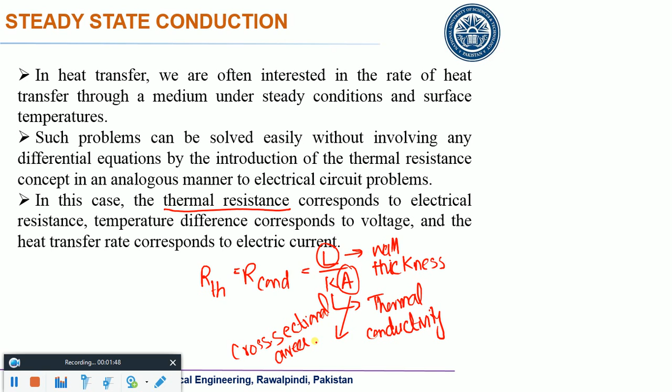Okay, we were at this point, and if you remember, we derived this thing. I would start from this one. We talked about derivation of temperature profile, if you have 1D conduction in an infinite wall.

And if you remember, we have one isothermal wall here, the other isothermal wall here, and you can derive the temperature profile if you have, let's say, some insulation or some flux boundary condition over some wall. You can derive it, right?

And we also derived this equation for this Q generation term. If you have that, then the temperature profile would become quadratic. If you don't have any generation term, the temperature profile would be linear.

So just to generalize this thing, this is, you can say, a note in the ongoing discussion. If you have a varying cross sectional area along the length, then what would you do? Till this time we have been talking about those walls where we have constant cross sectional area.

Constant cross sectional area, that is not going to change. But at some point you may have varying cross sectional area. Like if you go in this direction, you can see that the cross sectional area is varying, right? So in that case, what is the relation for Q dot? That is equal to KA dt by dx.

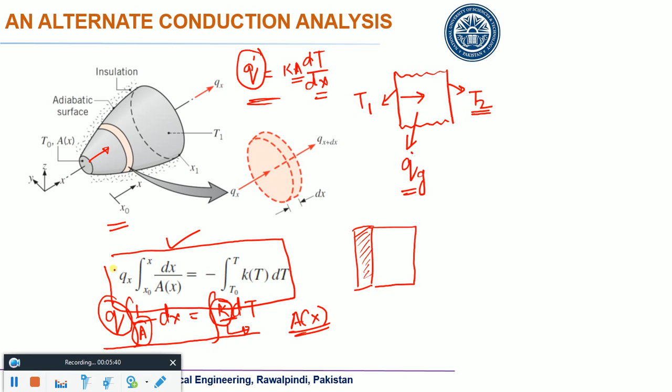Conduction happens in that layer. Outside that layer you would have convection, because there may be water or air present.

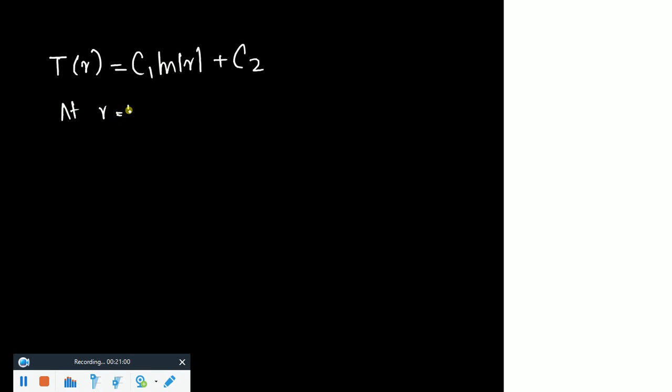So at R equals Ri, let's say, or R1, you had T equals TS1. At R equals R2, you had T equals TS2. Can you plug those two conditions over there? Finally, you would come up with this one.

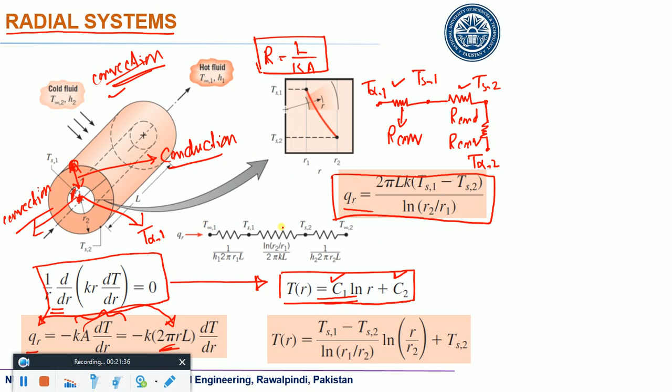Okay, why? Because QR is constant. Is the problem resolved? Any question? So you come up with this thing: QR equals 2 pi Lk times TS1 minus TS2, and then we would have natural log of what?

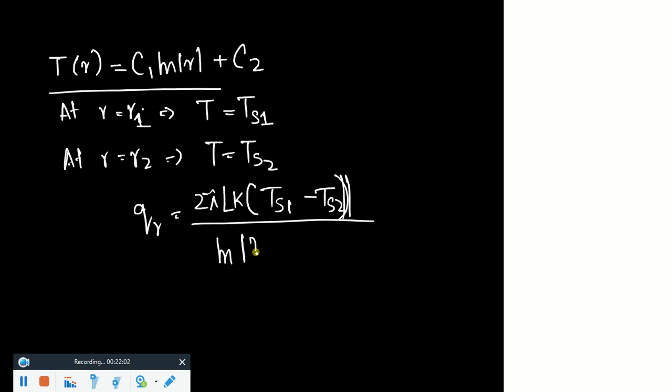R2 by R1. Yes, R2 by R1. Now see, this is what? This is just like voltage difference. This is just like current.

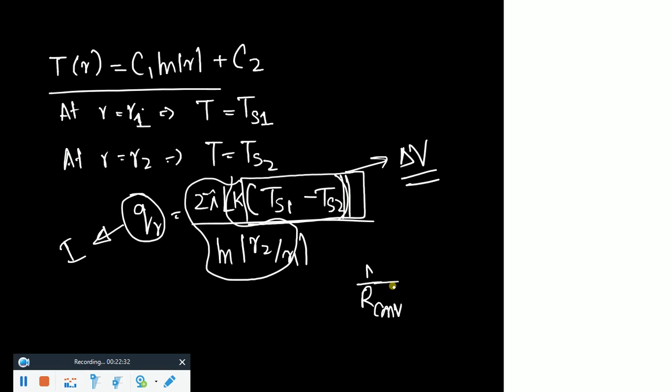So rest of the thing is 1 over R conduction in case of radial systems, piping systems, wiring systems. So you can say that R radial would be equal to natural log of R2 by R1 over 2 pi Lk.

You understand that? So this is the point which I want to emphasize: if you are talking about a plane wall, you know what the thermal resistance is. It is very easily understood: L by Ka. If you have a radial system, the form of the thermal resistance would change.

Now it is dependent on natural log of R2 by R1, divided by some part of the surface area, and then you have K over there as well. Just see, that was L over Ka. Instead of A you have this thing, instead of K is already there, and instead of L you have some dependence on radius.

Sorry? 2 pi L what? No, it is just a measure of area. Like what is the surface area of a pipe? It would be 2 pi R2 into L, isn't it? 2 pi capital R into L. So that R has been counted over there. Just do the calculation, derivation, and you would see how it goes over there.

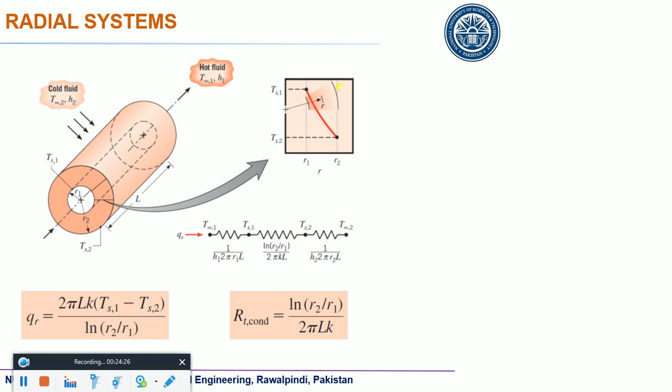So this is 2 pi Lk, and it is being divided by natural log of R2 by R1, and then you would have R radial. Do you understand that? Okay. No, it depends. It depends.

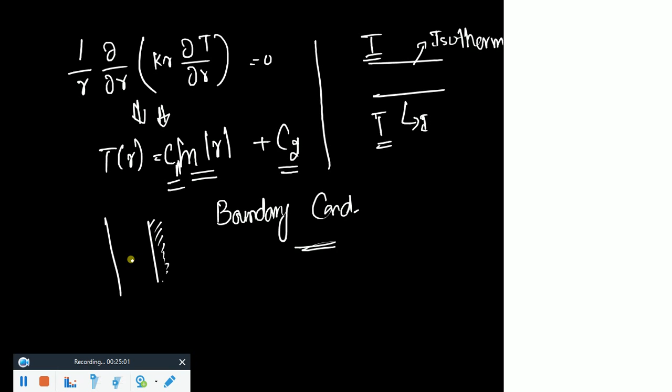Remember, those forms of thermal resistances have been derived for isothermal boundary conditions. I only considered temperatures on those two boundary conditions. So this is an interesting problem: if you take some adiabatic surface over there and you see what would be the thermal resistance. By the way, I talked about this thing in the last lecture, if you remember.

You should remember it. You remember I solved this problem when you have this T1 over there and dt by dx at the other side, which is equal to 0. So what was the temperature profile at that time? That was a simple constant temperature profile. The temperature profile was not changing, and by looking at the physics I can say that if I have some other temperature.

Other than this T1 on this side, and it is an adiabatic surface, heat would have no place to go once it reaches this wall. So it means this is basically physically impossible to have this kind of boundary condition: dt by dx equals 0 at some point, and then on the other side you have temperature.

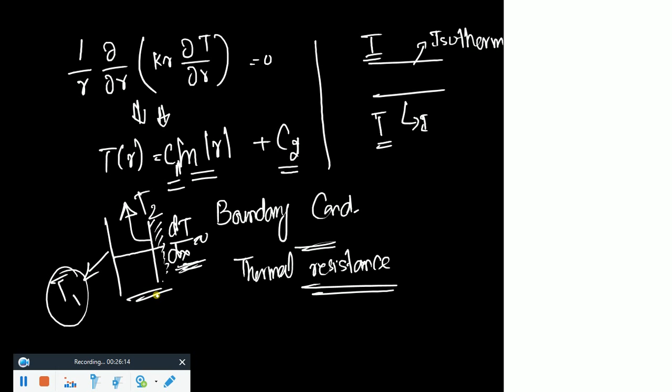So please look at these two conditions, but my point is we have derived this thing for two isothermal sides of a pipe, of a plane wall, and similarly you can see those relationships for sphere as well. So this is your reading assignment. You can see the sphere case in your book. Okay, now there is a very interesting problem.

For example, if you look at a plane wall and you start putting more and more insulation on that wall, what are you trying to do? You are trying to minimize the heat transfer rate, isn't it? If you put more insulation, you try to minimize heat transfer.

Now see, if you have a cylindrical wall, let's say a cylindrical pipe, and you are basically transferring some fluid from one point to the other, let's say it is steam. You can't have ideal insulation, you know that. All insulations would have some value for K, it can't be 0. It means some heat would be lost in any case.

Now for example, if this is a pipe, you have some fluid going through it, and you put more and more insulation on that pipe so that no heat transfer can be carried out from fluid to the air. Now my point is, if you increase the thickness, as far as conduction is concerned, your thermal resistance would increase. If you increase the thickness of the insulation, your thermal resistance would increase, you understand that? And you can say the heat conduction would decrease as far as conduction is concerned.

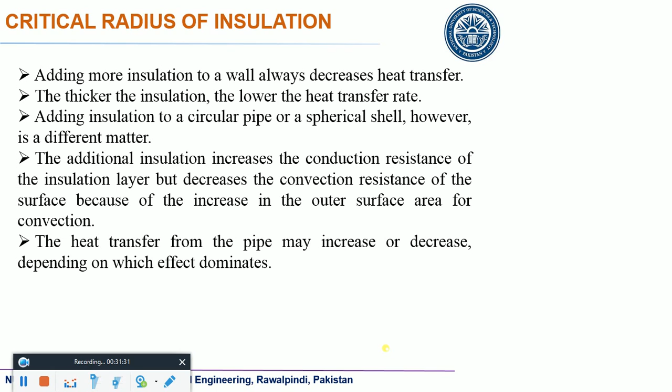So just look at that. Adding more insulation to a wall always decreases heat transfer, because it would increase the thermal resistance. The thicker the insulation, the lower the heat transfer rate, yes we agree. Adding insulation to a circular pipe or spherical shell, however, is a different matter. Why is it a different matter? I told you that adding more insulation on a pipe would increase convective heat transfer rate, but it would decrease the conductive heat transfer rate. So you should have some kind of compromise between those two.

So I want to solve this problem. Okay, I want to solve this problem. Just look at it.

Why? Because if you talk about this, this is conduction. If you talk about heat transfer from the outer surface, this is convection. Now, these are the thermal resistances for both of these heat transfer phenomena.

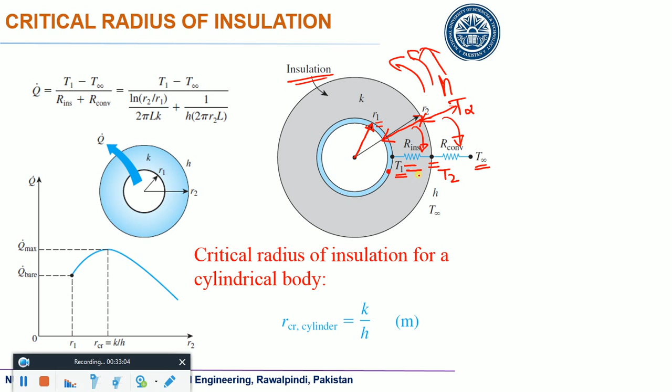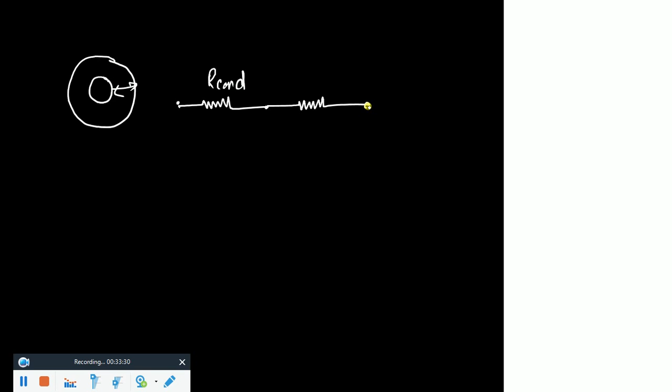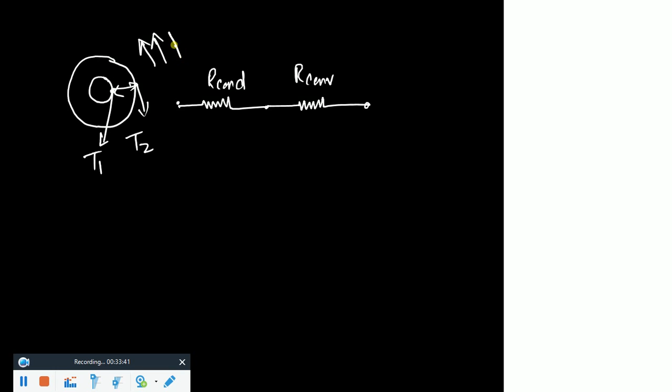Let me draw it over there just to clarify this thing. We have this pipe. For this conduction I have this resistance. For the next one I have convection. On this side I have temperature T1, on this surface I have temperature T2, and in the surrounding we have temperature T infinity.

Do you understand that? Now what is R total? R insulation plus R convection. Do you understand that? Right?

No, we are not talking about that one, although we can include that as well. But the problem is comparison between conduction and convection. What is the original problem? Just look at that, concentrate on that one. That is basically conductive and the convective which is happening outside - this is what is dominant. Do you understand that? So this is R total. Now what would be R total?

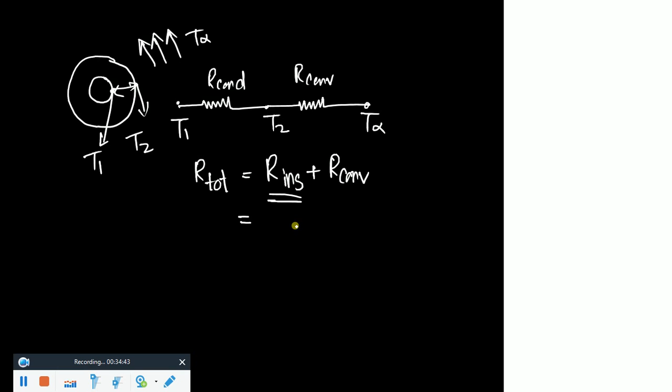By the way, this is a radial system, so what would be R insulation in that case? What was that? Natural log of R2 by R1, divided by... and what is R convection? If you remember, 1 by HA, we derived it in the last lecture. So that would be what? 2 pi R2 into L.

Oh sorry, this is H as well. Do you understand that? So now this is R total. Now because I do not know - I know this R1, but I still need to select this R, so I would not put R2 over there, I would simply use R. Do you understand that? Now this is total thermal resistance.

My problem is I want to find out the minimum thickness. I want to find out the optimum - I would not use the word minimum, I would use the word optimum. Let's say I want to find out optimum thickness. Now if you remember from your calculus course, do you remember how you find out minima or maxima of some parameter? You remember that?

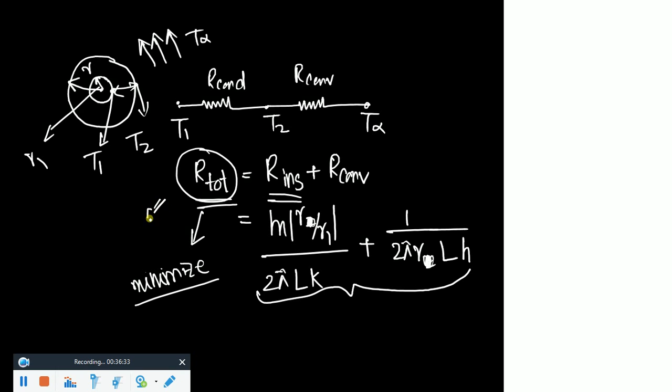If I want to find out optimum, for example, I want to reduce this parameter. Let's say my problem is I want to minimize this parameter, and this parameter is a function of R. So if I want to find out the minima of this parameter, I would take the derivative of this R total with respect to R and put it equal to 0. Do you understand that? Very simple.

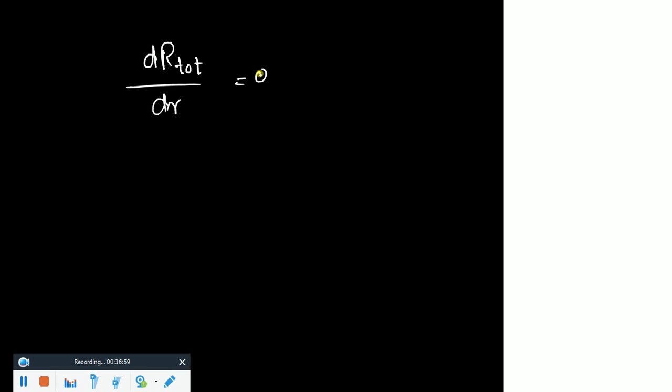Now I would simply write down the derivation and then talk about the physics. If you take this derivative, it comes out to be 1 over 2 pi k r plus 1 over 2 pi r square h equals 0. This is the derivative of that R total term. You have two terms over there, you can derive it yourself, differentiate it yourself, and from here you would find that R would be equal to K by H.

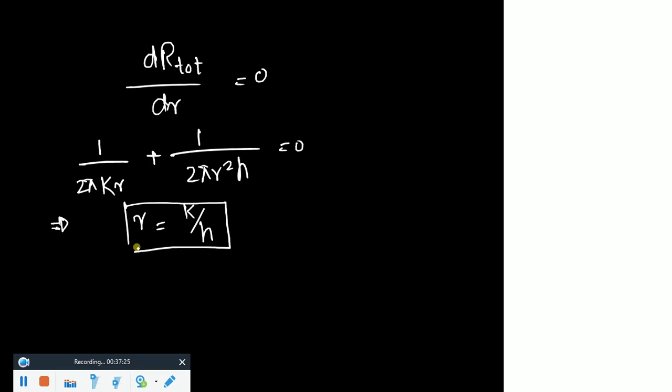So this is the radius at which you would have optimum R total. Okay, this is the radius. And if you want to find out whether this R equals K by H provides you the minimum R total or maximum R total, you need to take what? By the way, those two quantities should be positive.

Okay, both K and H are positive - just look at the derivation. If you have any problem, come to me again, right? So what was the point? That optimum R total can be minima and it can be maxima. You remember that from your calculus? So you need to perform what? Second derivative test.

Okay, you need to perform the second derivative test. So if I take this thing at R equals K by H, that comes out to be 1 over 2 pi K cube over H square.

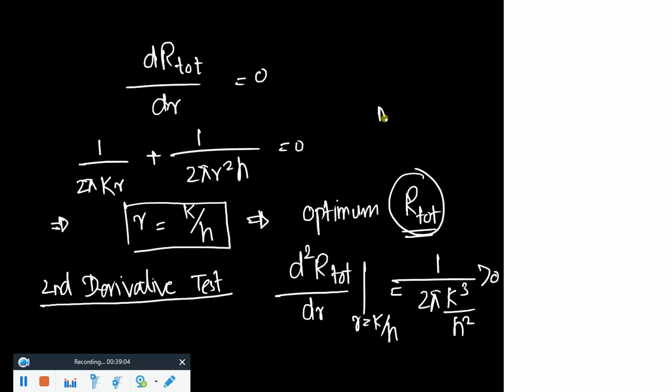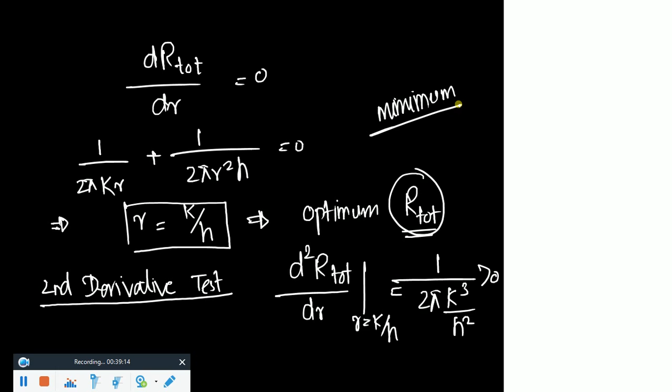Would this term be positive or negative? This term would be positive. So it means this was what? If the second derivative test comes out to be positive, you would have a minima at that point. If it comes out to be negative, you would have a maxima.

So now, by looking at this discussion, I can say that if I plot R total with respect to R, I would have this kind of plot, and at R critical equals K by H, I would have minimum R total. I can say this thing.

R total is minimum. It means heat transfer rate is maximum.

No, it depends on the application. For example, I would take two cases and I would tell you what is the implication of this relationship or this result. Case 1, you are talking about design of an electrical wire, let's say.

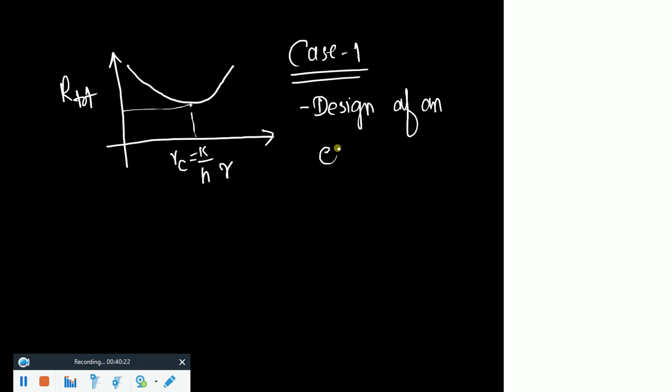Now in an electrical wire, you have current passing through it and then you have some portion of insulation, and that insulation basically tries to save the user from electrical shock, right? But that insulation should provide enough resistance so that all the heat generated within that wire can be transferred to the surrounding, so that the wire does not burn out. You understand that? So in that case, if you increase the insulation, I repeat, if you increase the insulation thickness, you should have what?

Your thermal resistance should decrease. If you increase the insulation thickness, your thermal resistance should decrease so that you can have maximum heat transfer, right? And this happens on this side. If you look at this portion, as you increase R, your thermal resistance would decrease.

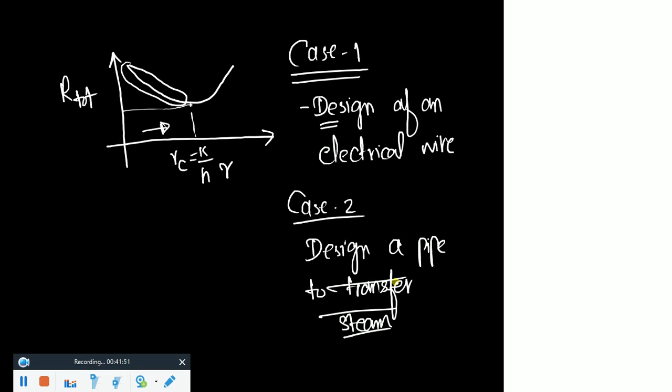You understand that? Now see, there is case 2. If I want to design a pipe to transfer steam, let's say, obviously you don't want to incorporate anything which reduces the steam temperature, right? If you put that steam into the pipe from one side, you obviously want that steam with minimum heat transfer to be carried out to the other end.

So it means if you increase the insulation, that R total should increase, isn't it? For minimum heat transfer, you should increase what? R total. Your thermal resistance should increase. It means you should go on this side. So you calculate your critical radius and then you keep on increasing it.

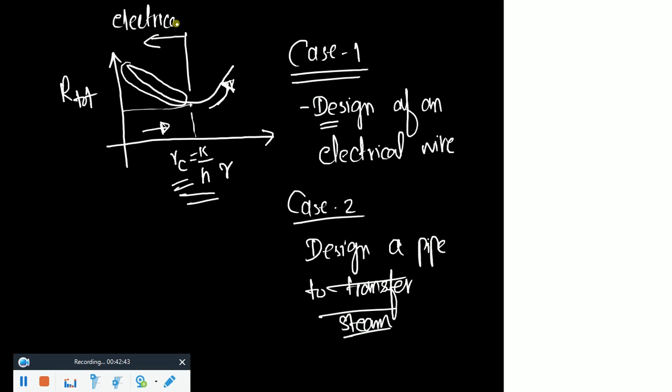And obviously, where would you end? It depends on the cost and the material. Obviously, there are other considerations. But as long as you are talking about heat transfer, this side is for electrical wires and this side is for pipes. Do you understand that?

If you want to design an electrical wire, you want your thermal resistance to be minimum or maximum? Minimum, so that the heat generated within that electrical wire should be transferred outside. So what does that mean? That thermal resistance should be minimum, but you need to put a certain amount of insulation just to save yourself from the electrical shock, right?

So it means if you increase the thermal resistance, if you increase the radius, if you go from this side to this side, you are increasing the radius, isn't it? You increase the radius, but still you are on this side of the critical radius, on the left of the critical radius. So if you are on the left, no matter how you increase the thickness, how you increase the insulation radius, your R total would be decreasing.